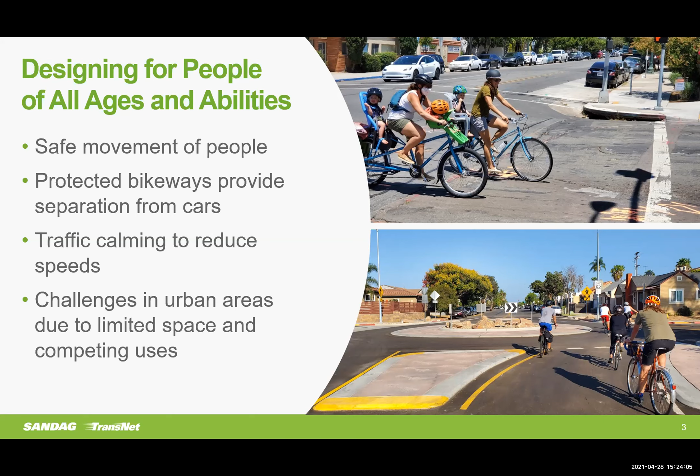So when we go about considering what we're going to do with our projects, we really strive to design for people of all ages and abilities, because we know that's really the only way we're going to get more people out riding and make things safe for people who want to get around and have a choice to not have to drive everywhere if they don't feel like it. So we do that by providing as many protected and separated bikeways like Bayshore Bikeway, especially in our more urban areas. In the older neighborhoods, we incorporate a lot of traffic calming. There are some challenges to this, but we've been going pretty good so far.

So I think if you're on the Bayshore Bikeway, you're probably somewhat familiar with all of the benefits of building better bikeways - safety, equity, the chances to improve health, improve access, and lowering GHG. And then of course there's also some benefits for our business communities as well.

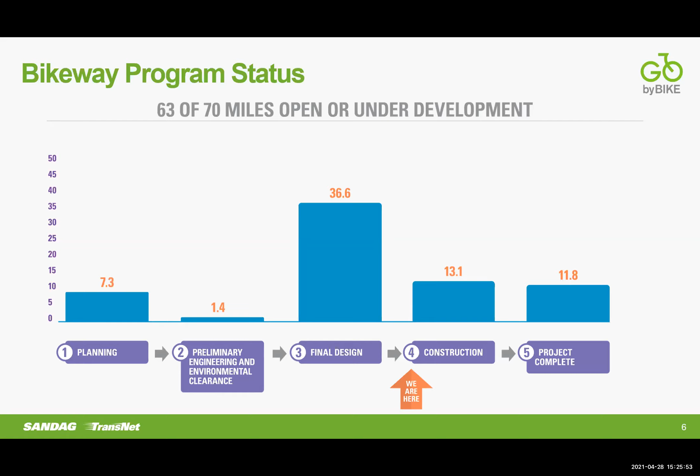Here's a little snapshot of our program, of our 70 miles. We still have about 7 miles that are in the early planning phase, just one project in preliminary engineering, 36 miles in final design - of which part of the Bayshore Bikeway and Border to Bayshore are part of - 13 miles in construction, and 11.8 miles of the 70 have been completed.

Here's a handy bit of information, because we get some of these questions pretty often about roles and responsibilities. SANDAG doesn't really own or operate any of the local roadways or have land use powers, but for our bikeway projects and other regional projects, we fund, design, and build the projects. It's up to our local jurisdictions, once the projects are done, to accept those into their inventory of responsibilities, and they're responsible for maintaining the bikeways over time.

And we do get some opportunities to work with our local communities to look for chances to provide street trees, landscaping, and enhance other types of enhancements. But again, usually the maintenance, as we've heard from a few folks, is a challenge. So when we do provide some of these extra features, it's good to be able to identify funding sources, either from maintenance assessment districts or business improvement districts.

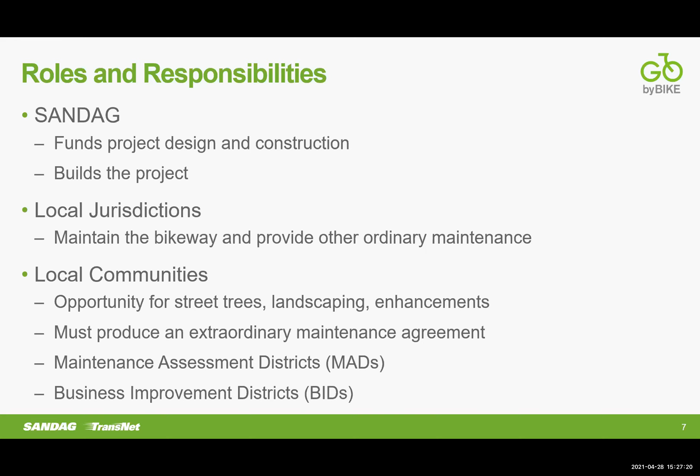Rather than just ramble on about a bunch of stuff that's happened over time, I did a little quick rundown by the numbers here. So 24 miles all the way around—some of you probably already knew that. Marcus got ahead of me on this one.

1976 was the first segment completed, for $50,000, to widen the Harbor Drive Bridge over Chollas Creek. Senate Bill 283 provided $1 million for bikeway construction, and by 1983 another $1.5 million had been put into the bikeway. Some unused railroad right-of-way along the Silver Strand in Coronado and Harbor Drive in the city of San Diego was used to kickstart the Bayshore Bikeway.

Then in 1989, the Bayshore Bikeway Working Group was formed. There are five jurisdictions: City of San Diego, National City, Chula Vista, Imperial Beach, and Coronado. And of course there are other significant folks who play a big role—the port, the Navy, and all the different communities and advocates surrounding the Bayshore Bikeway.

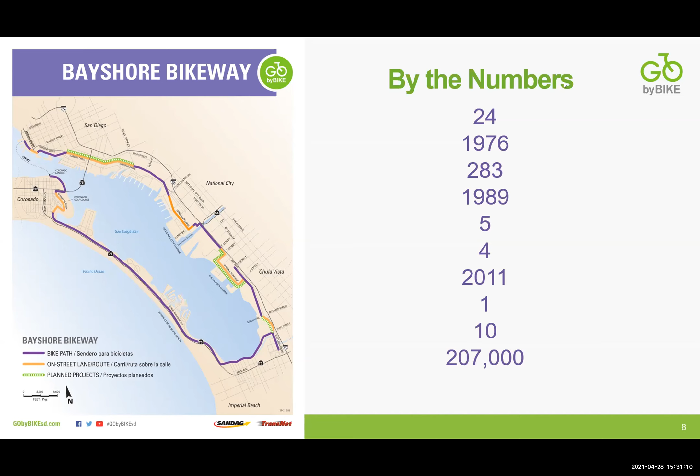207,000 over approximately the last year—that's how many users were on the Bayshore Bikeway. It's probably more than that, but that's the statistic we put together using our one permanent counter, part of a network of 10 that SANDAG is now maintaining around the region. You can see on the graphic there, 184,000 people were biking past this spot, and another 23,000 people walked past that.

Sometime we'd like to get an annual estimate of the total number of users, because obviously not everyone in the year went past this spot. I think that would be a really big number to show how many different parts of the community, and how many different key segments of other bikeways, are coming into the hub that the Bayshore Bikeway serves as.

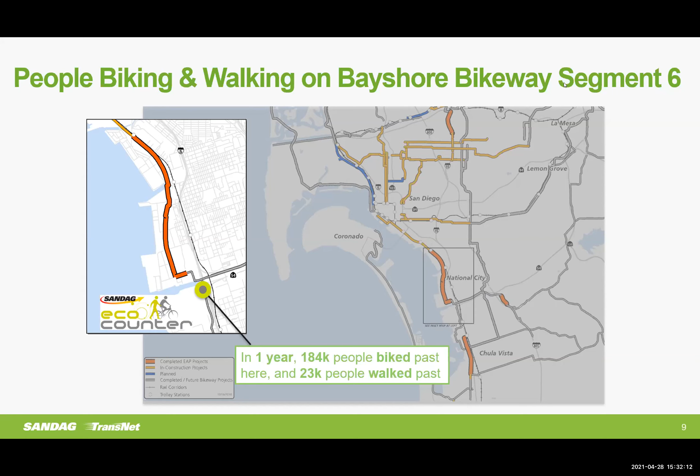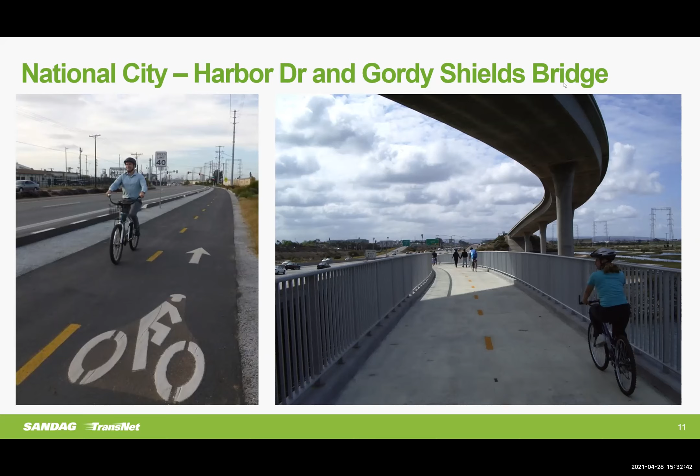I know a lot of you have been around the Bayshore Bikeway probably many times, but just a quick tour: starting at the San Diego Ferry Landing, cruising down the Embarcadero in the city of San Diego. If you go down to National City, there's one of the newer sections completed on Harbor Drive, and keep heading south, and you can cross the famous Gordy Shields Bridge.

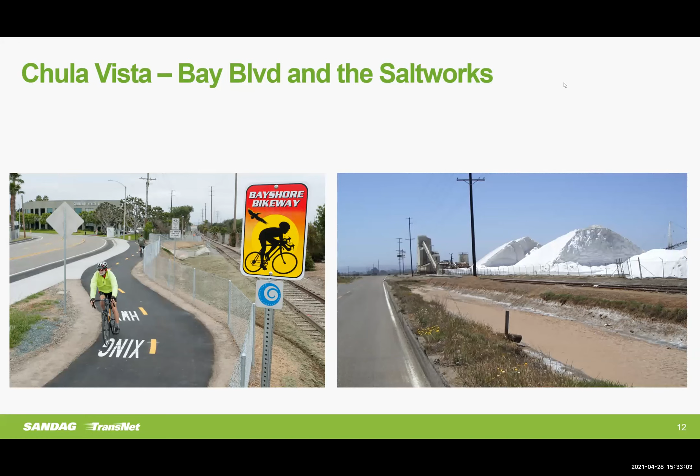Once you get to Chula Vista, there's one of the old school Bayshore Bikeway signs, another newer section on Bay Boulevard, and then the infamous section on the Salt Works. Still looks pretty cool, at least, but it would be nice to get that section done, of course.

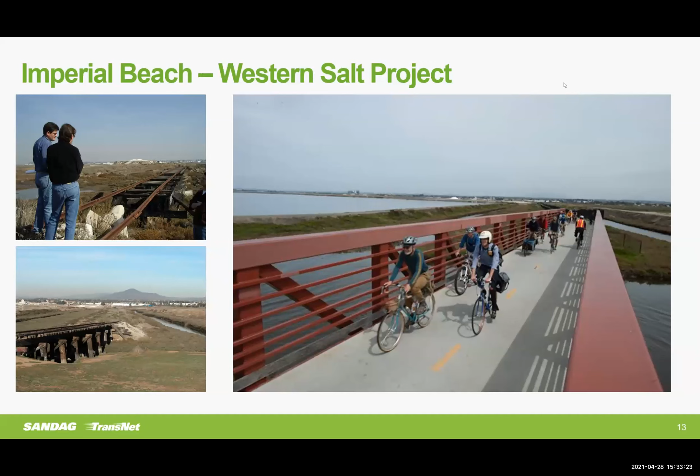Imperial Beach has seen some big projects finished over the years—little before-and-after shots I was able to dig up from the archives. There's Randy there, you can see him in his helmet. Here's an example of some of the economic impacts new bikeways can bring: the Bikeway Village in Imperial Beach, and an example of one of our branded wayfinding signs for the Bayshore Bikeway.

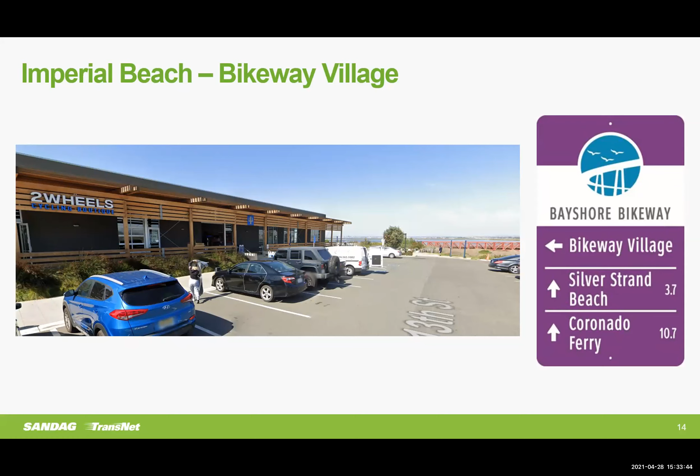And then continuing up the Strand to Coronado, and around the golf course, back over to the ferry landing to head back to San Diego.

And that's our quick overview of the history and some of the different segments and sections of the Bayshore Bikeway.

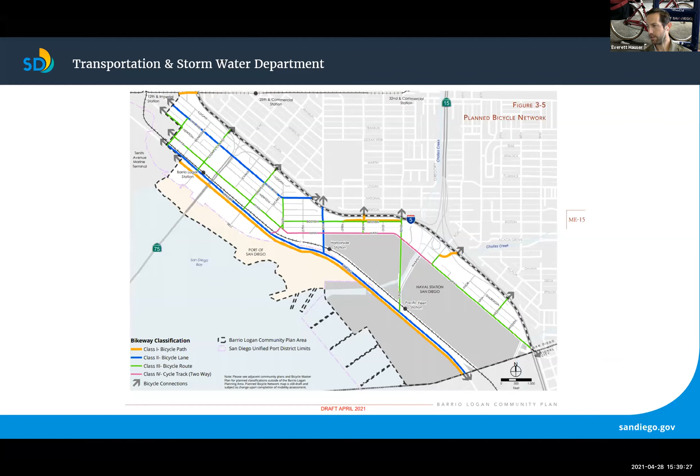Here is the figure from the plan, the planned bicycle network. As you can see, Chollas Creek here, this was an element from the previous project, class 1 along the creek, coming down to Main Street along Rigel. Where the previous one continued along the creek and then down 32nd, this alignment will continue along Main Street and connect at Schley to the Bayshore Bikeway. So again, as I mentioned, we continue to work on the design to move this forward, complete that, and then we'll work on getting some construction dollars to finish this project up.

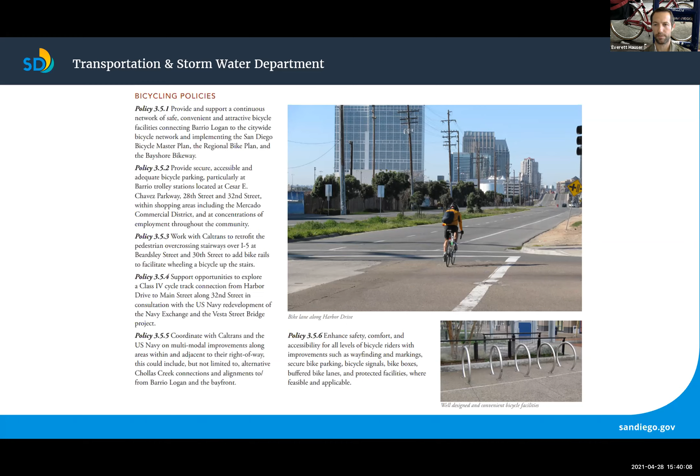Other elements of the plan of interest are the additional policies related to bicycling. The one I wanted to highlight for the group today was 3.5.4, still supporting a connection down 32nd Street, if we can find the available space, knowing there's still a lot of changes to occur in the area with the SANDAG projects, Navy redevelopment, and Vesta Street Bridge opportunities. We'll continue to keep that in the plans and seek to provide as many connections as possible over the course of time and bikeway development.

This is Michael Prinz from the Planning Department's project, and they are open for question, comment, and suggested edits to the community plan, for all topics as well. They've identified May 21st as the deadline to provide comments for the Barrio Logan Community Plan. And that concludes my short presentation and update.

Great, thank you Everett, appreciate that update. Do we have any members of the public that wish to speak on this item? Chair, Nicole Burgess wishes to speak. Great, Nicole, two minutes.

Thanks Chair, and thank you Everett for the presentation. As you know, the Chollas Creek Coalition is very involved with this connection, as it really is an important and vital connection. Hearing that this was the route of the Bayshore Bikeway in 1976, it is more important than ever that we really evaluate this connection. I appreciate staff, Linda Culp and others, for advocating for this connection down 32nd Street, as it is the direct link from Chollas Creek, the alignment that can get us all the way to La Mesa and Lemon Grove.

I've ridden there a couple times in the last couple months, and we have to be able to have that direct access to the waterfront. For residents that come down the Chollas Creek that want to go south, it's kind of pointless for us to go north before we head south. So I really hope that this will continue to be a priority to be looked into as an extremely important corridor, moving our residents up into City Heights at Oak Park and District 4, 8, and 9. Thank you for the presentation, Everett, and appreciate your comments.

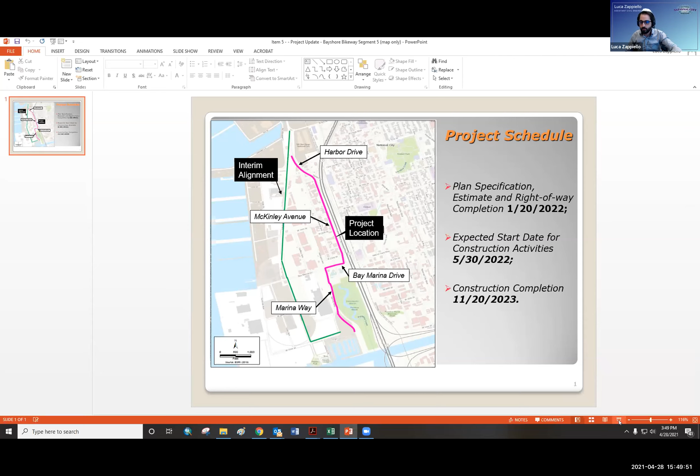Congratulations, council member. Good afternoon, everyone. Let me share my screen. Okay.

Good afternoon, everyone. My name is Luca Zappiello from the Engineering Public Works Department of the City of National City, and today I'm going to provide a quick update of the Bayshore Bikeway Segment 5 project. The Bayshore Bikeway Segment 5 is a 1.5 mile protected bicycle facility, Class 1 and Class 4, along Harbor Drive, McKinley Avenue, Bay Marina Drive, and Marina Way. The city and the design consultant, Chen Ryan, are still in the preliminary design phase of this project, working to define the final alignment of the bikeway path.

Currently we are working with multiple agencies, including Caltrans for the National Environmental Policy Act (NEPA) study, the Port of San Diego, the California Fish and Wildlife, the BNSF, County of San Diego, and the Coastal Commission.

In terms of project schedule, we have the plan, specification, and estimate, with right-of-way completion in January 2022. The expected start date for construction activities is May 30th, 2022, with construction completion in November 2023.

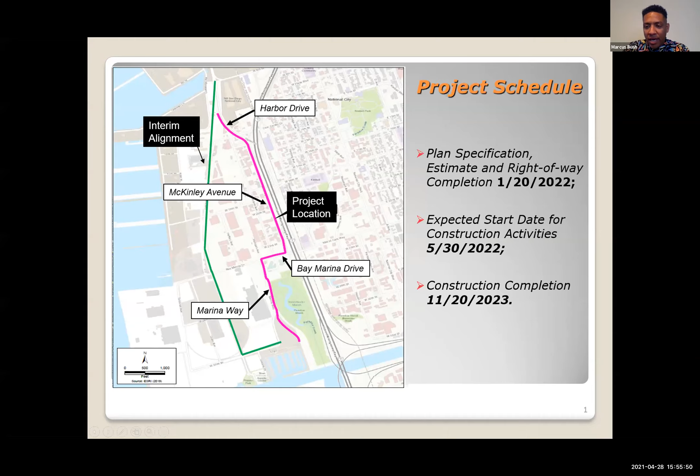So really excited about that potential. It's visionary, still in the very infancy phases and still a dream at this point, but we're moving forward, and it does have an indirect connection to improving our bike network. So we'll let folks know about that. And with that, I don't see any other comments, so thank you, Luca. We will move on to the next item.

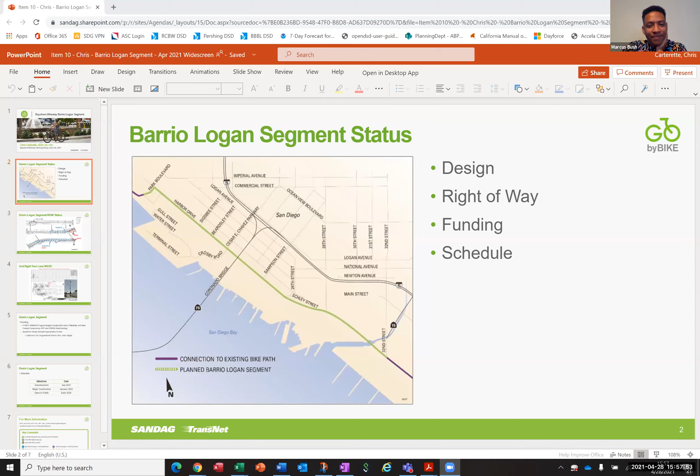I see it almost. There we go. Is it working? Thank you, Chris. Yep, it's up. Nice work. Okay, thanks. I appreciate everyone's patience. Of course, we're on the wrong slide.

There we go. All right, so Chris Carterette, project manager, Bayshore Bikeway Barrio Logan segment. I guess they're really segments 2 and 3, just because they have numbers, but we call it the Barrio Logan segment. I think that I just want to start by saying a couple of things.

One is that we are really trying to serve all users, all ages and abilities, and I think the person shown on the bike here on the title slide, this person could also ride a road bike in Lycra and clip-in shoes, but flip-flops and fat tires, that's a way to go too. Our program is really proud to try to serve everybody, and that is a real important part of the Bayshore Bikeway. It does serve athletic riders as well as recreational riders, and people of all abilities riding bikes in all different conditions for all different kinds of reasons.

So in any event, I'm going to kind of update on 4 main categories. The first thing I want to say is that this has just been an incredibly challenging project. I don't know for how many years this has been on the agenda for status updates. I'm hoping that before long we'll be talking about construction. It is our intent to put the project out to bid very soon. And I'll talk a little bit more about that.

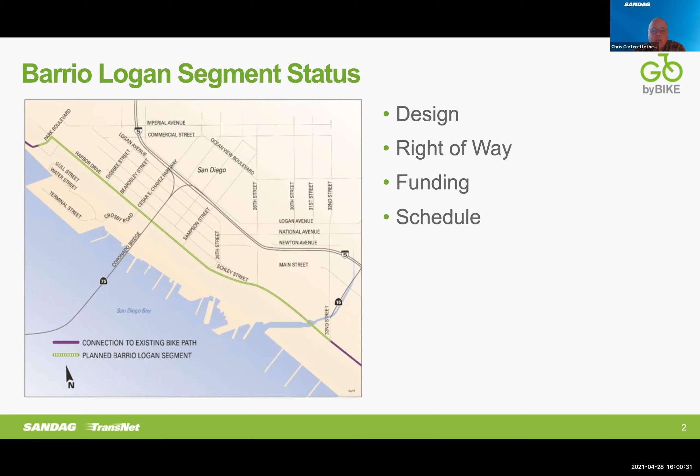So another challenging aspect is our right-of-way. I am happy to report that since my last presentation to the working group, we did finish our agreement with NASSCO, and it's being executed now. And so that's a nice little accomplishment.

We've also had great success moving our effort forward with the Port of San Diego, which is a 3-party agreement, also with the City of San Diego. And so we're getting the last details of those hammered out and hope to move those forward to City Council and the Port Board.

And then we have some pretty difficult stuff that we're working on with BNSF as far as right-of-way goes, and a lot of it ties into details about the grade crossings, and so that's the stuff that we're just relentlessly trying to get taken care of so we can just put it aside. But we're going to move forward with these items at risk because we just have to. Otherwise, we're going to lose our funding.

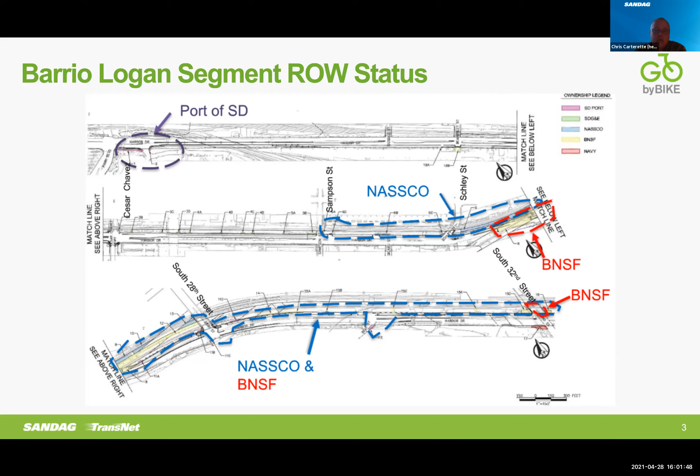So we also have something we're coordinating with the Navy in order to provide a second right turn lane at Gate 6 at the 32nd and Harbor intersection. And that kind of hinges on this pesky power pole that's prominently at the intersection. So we meet regularly with SDG&E to see about advancing that. We met today, and unfortunately I didn't get any new information. So it's just really frustrating, and we continue to try, and the Navy are great partners, and they're with us, and we won't let go of this item, and we'll eventually get it done.

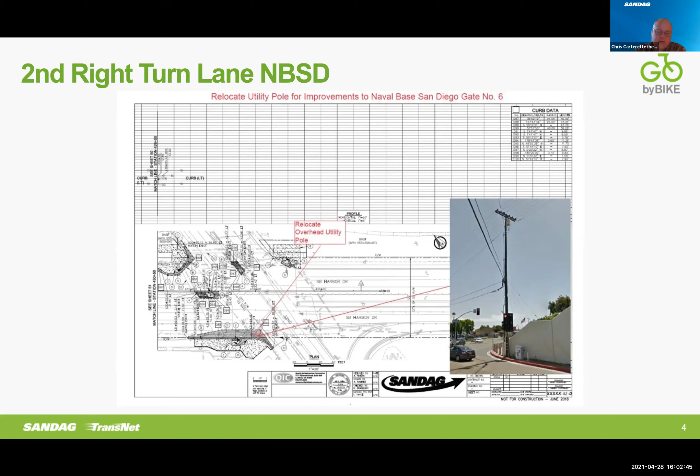We also anticipate bringing some pandemic relief stimulus money onto the project. We recently put in an application for a House earmark with the Honorable Juan Vargas in our 51st Congressional District. So we continue to look for funding to bring onto the project, but we will be advancing it shortly for bids.

Our goal is to have it out for advertisement by July this year, and by doing so, we can be pretty confident that we'll have the project awarded to a contractor by our funding deadline in January 2022. To get technical with you, it's about a 480 working day project, so that'll amount to probably a little more than 2 years of construction duration, and then we should have a rideable bikeway, which is going to be fantastic, and it's a pleasure to be working on it for the residents of our region.

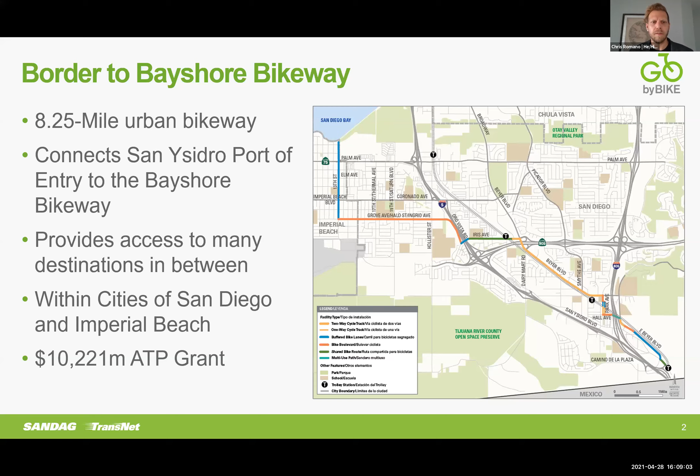I'm not going to get too into the project details. I can do that at a later time if desired.

Just to speak about where we're at with the project, we are almost done with our review phase with our partner agencies. We've been working with the City of Imperial Beach, and they've already approved the plans. The City of San Diego is very close to approving the plans. In addition, this project crosses 3 points where it crosses a rail line, so we've also had to coordinate with MTS, the CPUC, and Caltrans to get permits for those efforts. We've wrapped up those discussions and come to an agreement that we think works for everyone, so we're just waiting for final sign off.

Great, appreciate that presentation, Chris. Staff, do we have any members of the public that wish to speak on this item? No members of the public, Chair.

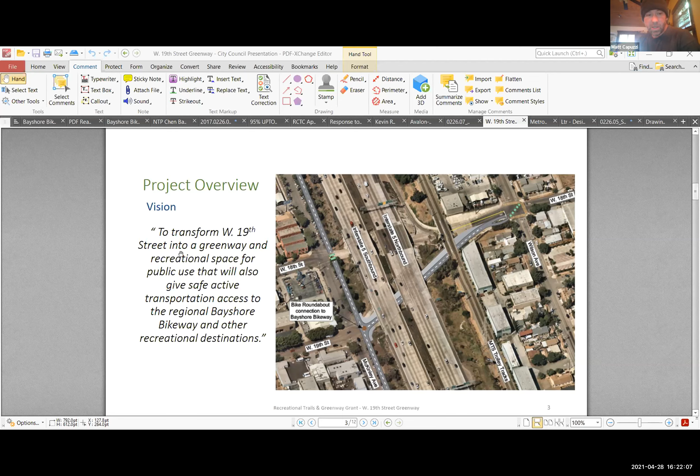I have some other exhibits. This is called a greenway, so it's going to have some different elements. There's some public art proposed, parcourse stations, exercise stations, chess and checkers tables, places to sit, security cameras, and lighting for underneath the freeway there.

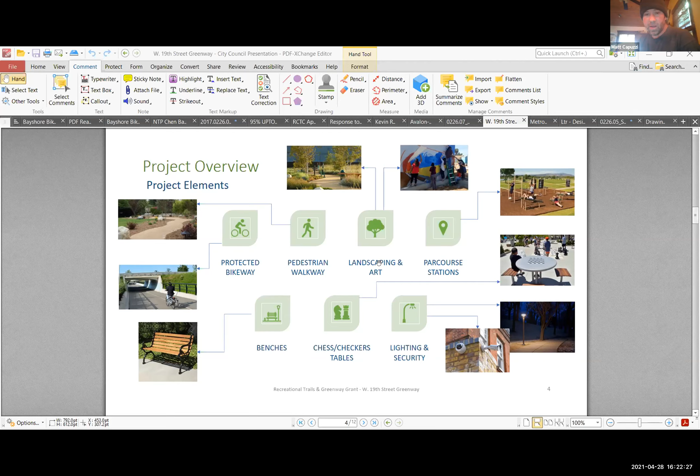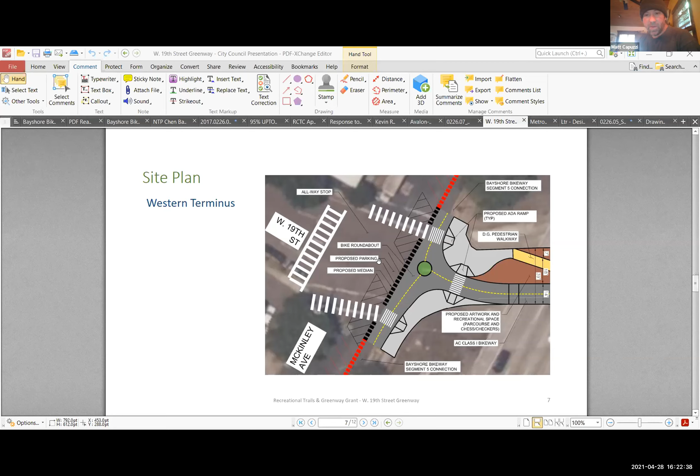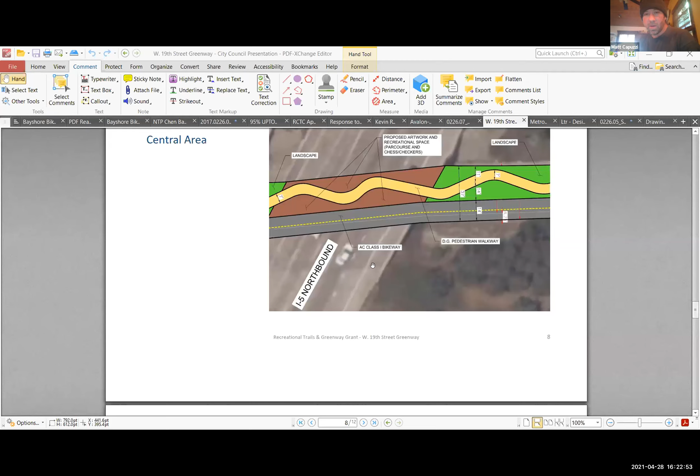And we have some conceptual design plans. This is where the greenway would tie into the Bayshore Bikeway segment 5 on the western end, and this is underneath the freeway. We're going to be planting landscaping where we can, but obviously under the freeway it won't grow very well, so those areas will be DG with some art features and other parcourse and chess checkers tables.

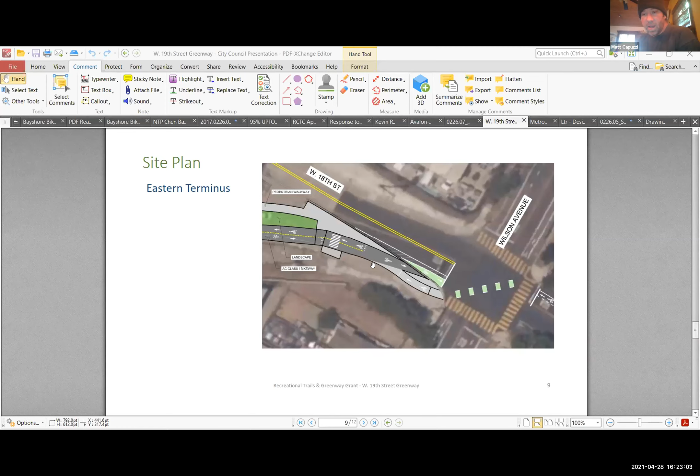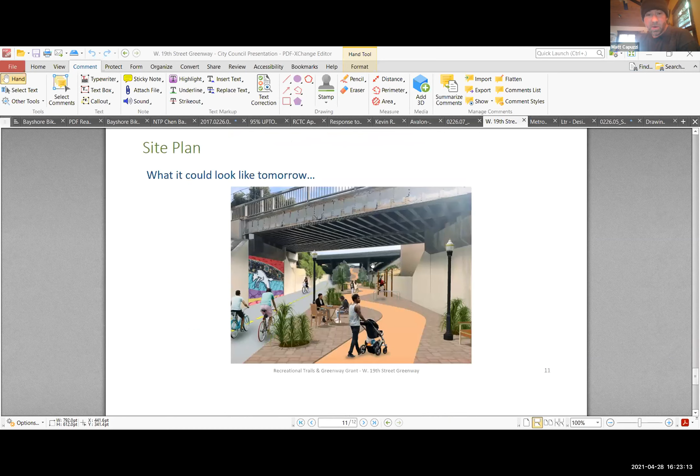This is where it ties back into the existing class 2 bike lanes on 18th Street that continue east through National City. This is what the area looks like now, and this is the vision for what it's going to look like in the future. Thank you.

Thank you, Matt, appreciate that update. Just so I'm clear, you're from Chen Ryan, right? Yes, sorry, I should have introduced myself. No worries. Yeah, so thank you so much for the work on that. I'm really proud of the work that Chen Ryan has done regionally on these active transportation projects.

This is a project I mentioned earlier, the potential pedestrian bridge over the I-5 connecting 24th Street trolley station to the Bayfront and Bayshore Bikeway. That project is probably a good 7 to 10 years off still. So I think this is a great connection on that 19th Street, which is a few blocks north, but it's still an important segment. Really appreciate that it's a more short-term project, and really appreciate it because it's needed. So thank you. You're welcome.